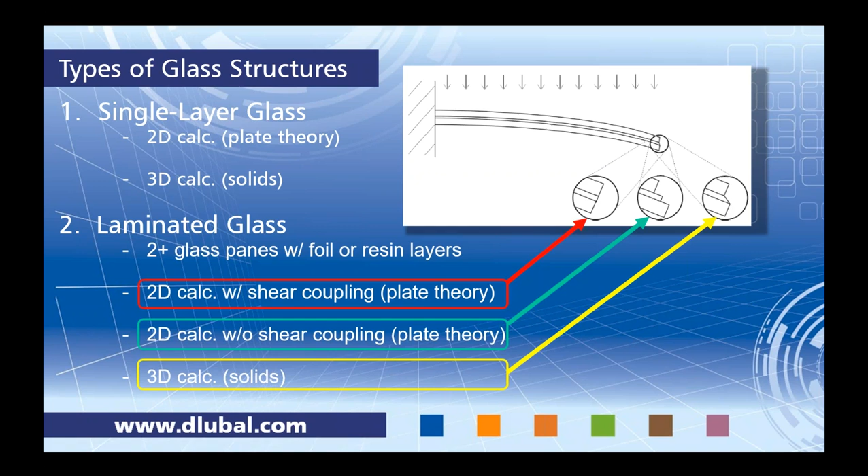Like I said, this is certainly the most accurate option. A downside to this, though, is that your solve time will be longer than typical plate theory.

This will always use large deformation analysis. With the other two glass types, we can do a linear analysis or a large deformation. Typically with plate theory, you're running a linear analysis, but for insulated glass, we actually only give you the option for 3D calculation with solid elements. That's because when you throw in this gas layer, there's really no other way to get the accurate behavior of the shear coupling between the glass layers with anything other than solids, meaning that plate theory with 2D elements is not applicable for insulated glass.

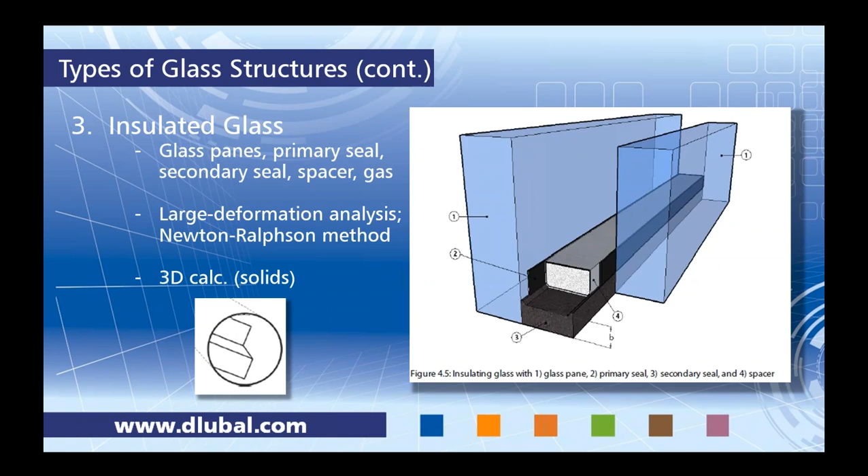So the first being a local calculation. That is where an individual glass surface is analyzed in RF glass. Despite having any supports or boundary members drawn in Rfem, we have to redefine those supports and boundary members in RF glass. With the local calculation, we can either do a 2D or 3D plate theory or solid analysis. And with insulated glass, this always falls under the local calculation because, like I said, we can only do a 3D analysis type with insulated glass.

Now, the other option is a global analysis where the entire model in Rfem is considered. So therefore, things like supports and boundary members that were originally modeled in Rfem will be taken into RF glass. The caveat with this is that we can only do 2D plate theory for this type of analysis.

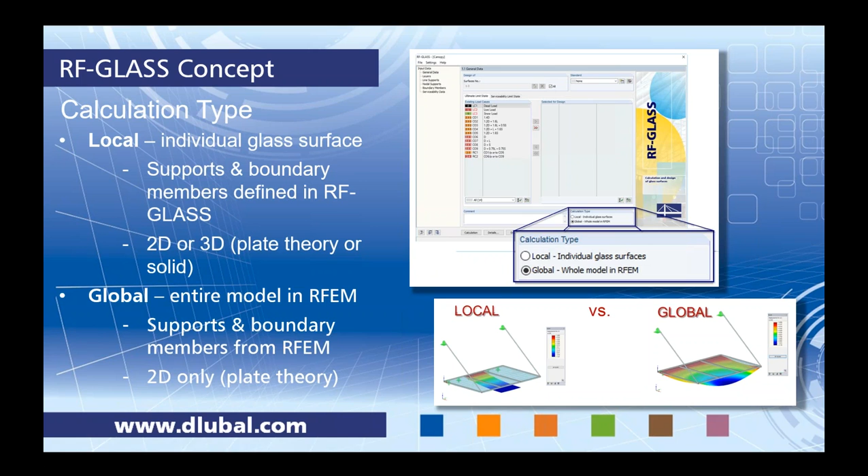So you're probably wondering, well, why would I ever want to do a local calculation if I have to redefine supports and boundary members? Two reasons for that. One, we cannot do a 3D solid analysis with a global calculation. So basically, if you have insulated glass or maybe very thick glass layers that a plate theory won't give you accurate results, the only option is to run a local calculation. The other reason being that the support types as well as the boundary members can be identified in RF glass in much more detail than what you could ever do in Rfem. That's kind of the advantage. Again, we'll see that when we go through some examples today of local versus global.

So with that, we can jump into Rfem. When you begin a new model, you will see this general data box pop up. We just need to first give it a model name, so I gave it some arbitrary name. I have the load combination set to ASCE 7. You can see here that we have the Canadian load combinations as well as many international codes. And then I have the checkbox to create those combinations automatically.

I also always open up my template model. Any model can be saved as a template model, meaning that maybe you have your grid settings the way you'd like, your printout report, your unit set exactly how you want. So then every time you open this template model, everything is ready to go and you don't need to adjust anything next time. So if I click OK, this will go ahead and open up a new model for us. I'm not going to spend too much time today on modeling techniques. We're really just focusing on glass analysis today, but if you are interested more in general modeling in Rfem, we certainly have plenty more webinars such as this recorded on our YouTube channel.

So how I'm going to begin now is I'm going to draw a line element. You can see here that we have a single line element, but we have many more options such as polylines, ellipses, arcs. So basically any CAD-like feature, you're going to find a lot of those in the program itself.

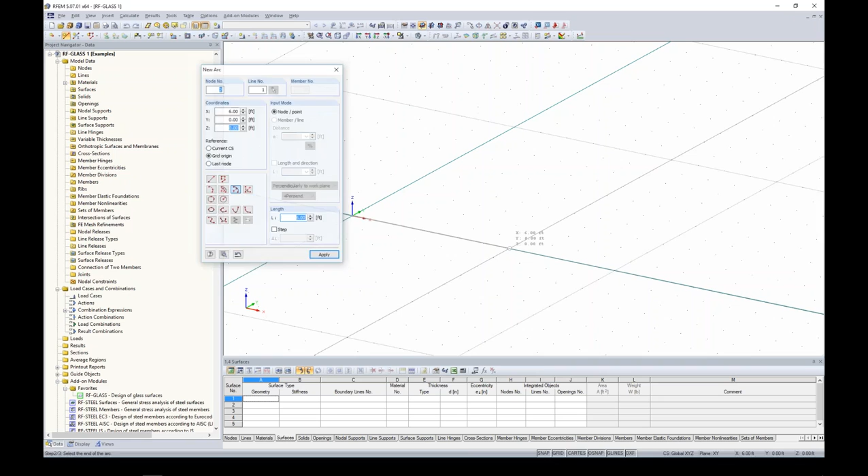For this option, I'm going to choose an arc by defining first my points at 0 and 0, and then I'm going to use my snap point to 6 feet. And then you can see now I want to define my radius. I want to actually reverse the orientation and define my radius at 6 feet.

So now I just have a simple line element. This isn't a member, it's just a line. And then I can actually select this line, right-click, and extrude the line into a surface.

Now, if you were present in my last webinar on cross-laminated timber, the glass module somewhat acts the same way. And how I mean that is the program is asking us now, what material do we want to use when extruding this line into a surface? And realistically, this doesn't matter right now for glass.

This concrete is just a placeholder. So it doesn't matter if I choose concrete, steel, or aluminum. It's simply a placeholder.

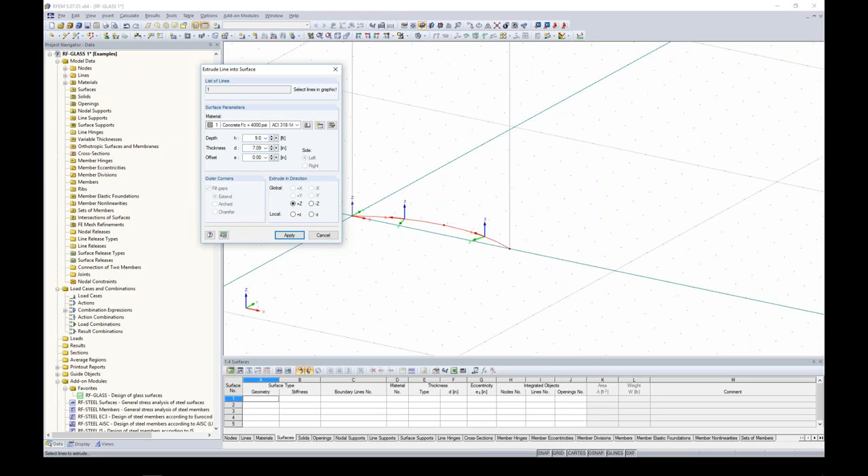The height, though, we do want to specify the correct geometry in the program, with the exception of the thickness. Thickness doesn't matter either because all of our layers and such we will be defining in RF-GLASS.

So if I hit apply, then I can see that I have this surface now created with just a few clicks of a button. The next thing to consider is maybe we have some type of handrail on our glass panel here.

And I don't want to model the handrail itself, but I'd like to create a line so that I can add in a line load to this surface.

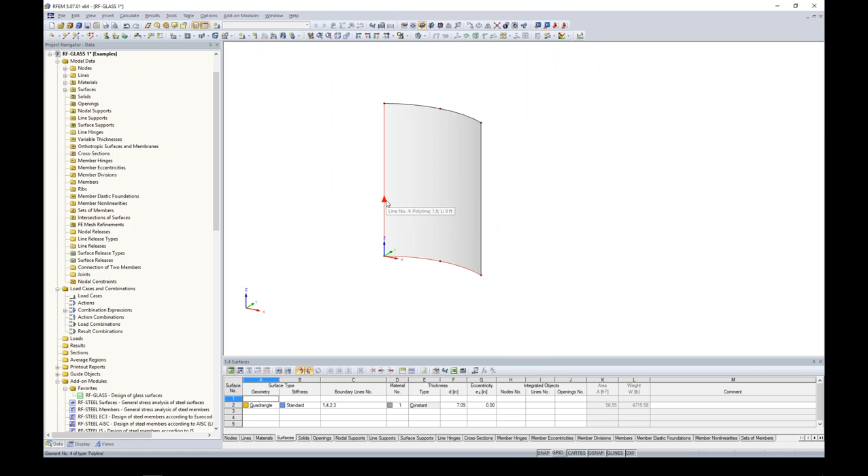So all I'm going to do is select this bottom line here and use my move and copy tool and move it up 3 feet in the positive Z direction. Now you can see that that line is integrated in that surface.

So quickly adding some load cases. Here I will go ahead and add my first load case, dead load, and you can see that the self weight is automatically checked on for self weight.

I'm going to create a new load case called wind load pressure. And you always want to define the correct action category, and the reason why is the program automatically created all of these ASCE load combinations. If you don't apply the correct action category, then you're going to get the wrong load factors.

So I'm going to make a quick copy of wind load pressure, but call this one suction, and then make one more load case of live load and give it the live action category. Okay, so I can click OK here.

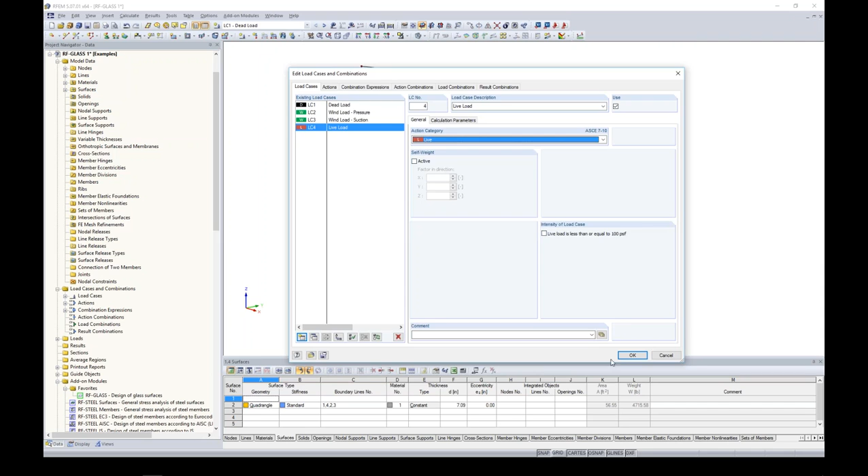Now, if I go to my drop-down box, you'll see that the program automatically created all of those ASCE load combinations. I'm going to skip dead load for now. We'll just consider self-weight, but wind load pressure, we want to add our first surface load on.

If I right-click, I can turn on my local axis system, and I want to add a new surface load. Because we have a curved surface, I want to apply this wind load pressure on my surface in the local Z direction. And you'll notice down here the little picture updates depending on what direction you're applying your load to, which is nice. So in this case, I want the local Z direction.

I want my magnitude to be negative 0.03 KSF. And all I need to do is click on the surface and my area load is applied.

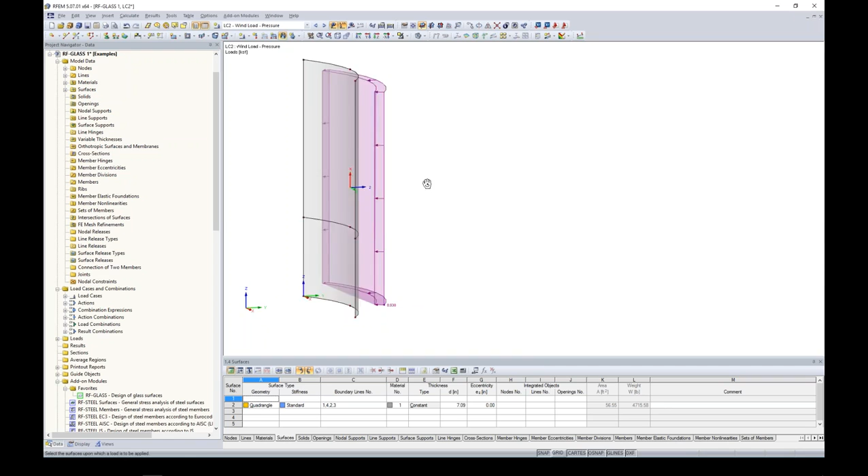I'm going to switch load cases to suction. I'm going to again add a new load in the local Z direction, but this time it will be 0.02 KSF on the other side.

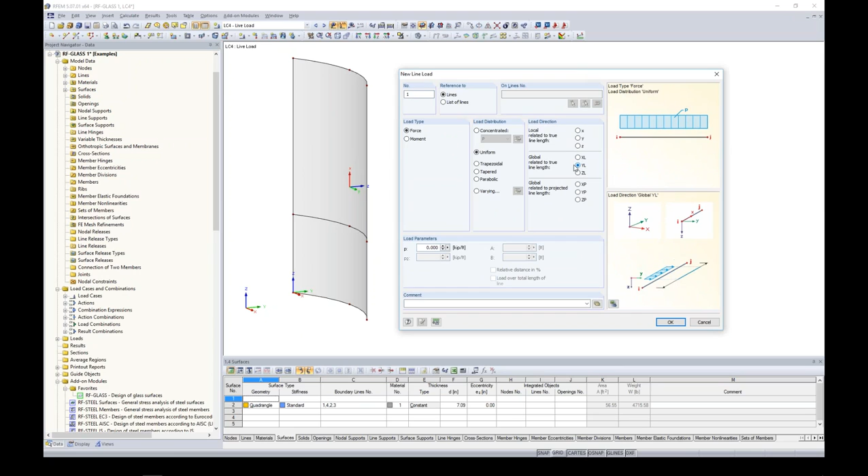And then lastly, we have live load where I will add in a new line load. This I'm going to apply in the global Y direction with a magnitude of 0.07. And then all I need to do is click on that line.

So now we have all of our loads added to this surface. All of our load combinations are done. I want to check my finite element mesh settings. So if I go to calculate and FE mesh settings, the default is set at 1 foot.

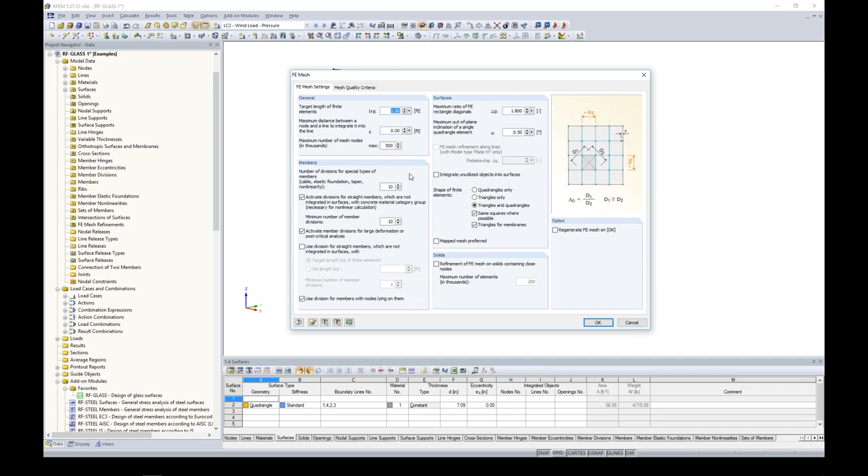The length of 1 foot would probably be okay in this situation since we really don't have much going on in this surface, but it is only 6 by 9 feet. So maybe we want to decrease this to something more like 0.5 feet.

If I go to calculate, generate FE mesh, now we can see the FE mesh is automatically generated. Keep in mind this is different than some of the other programs in that all finite element meshing is done automatically. If I were to move this line up an inch, everything would automatically be readjusted. So you never have to worry about changes happening in your model and the finite element having to readjust that manually.

Everything is done automatically. Now we are ready to jump into our add-on module. So we have this extremely long list of add-on modules, but if I right-click on any of the add-on modules, I can select it as my favorite, which will automatically move it up to the top of the list. So now I can launch RF-GLASS.

Okay, so taking a look at RF-GLASS, as I mentioned, this is the add-on module, nothing more than a dialog box. You can see here that all of our load combinations were brought over from RFEM. The first question it's asking us is what surface do we want to go ahead and design? And you can check the all checkbox since we only have one surface.

Now the other couple things to note here is that we do have the German annex for the standard to go ahead and do glass design. For us, we're going to be doing just an analysis, so we will be choosing no standard. And there's a little bit of a translation issue right now, but don't worry, that will be fixed soon. This is none in German.

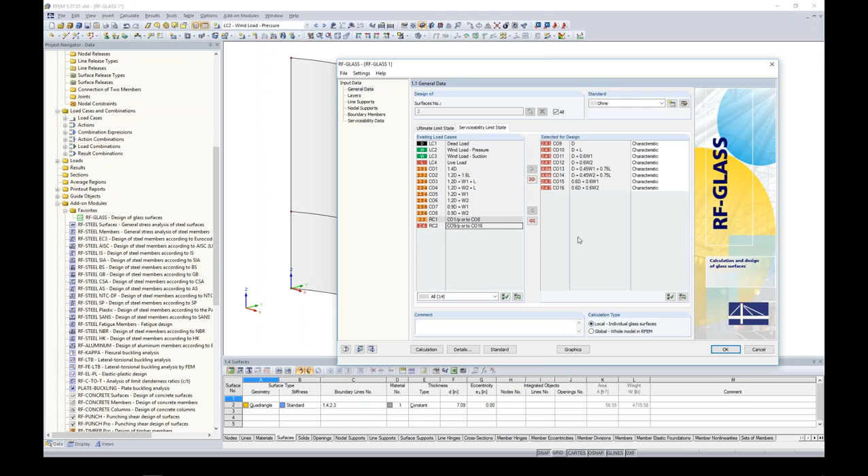And remember back to the PowerPoint, this is what we were discussing on local versus global. My two examples now will be local. So the first one will be local, individual glass surface. We'll focus on that and then we'll get into global a little bit later. And with any add-on module, you just simply work down the list. And extremely intuitive to use. The program kind of sets up your workflow for you.

So we're moving on to layers here. It's asking us, okay, so we can create a new composition. You can rename this. You can create as many compositions as you'd like for different surfaces in your model. For us, we'll obviously only have one composition for our one surface. We need to select which surface this applies to, and we can define our first layer type.

So our first layer type will be glass, and here will be the option to jump into our material libraries database. And typically the standard when you select this will be under the material category glass, and all of these options will be listed. We don't quite yet have the ASTM materials in there, but really that's no problem at all. I added this thermally toughened float glass to my ASTM standard. So anytime that you add in a new material, this will of course be remembered for any future files or models that you were to create with this glass module.

All of our properties are shown in the same dialog box, so everything is okay there. Now my thickness, I want it to be 0.2 inches. Again, all of our material properties are shown to the right here.

Our next layer will be foil. And with this, believe it or not, we actually do have a lot of ASTM foil materials already integrated in the program. For this particular case, I will use 20 degrees Celsius at 1 minute. Again, the foil material properties are shown here. The thickness of 0.01 inches is fine.

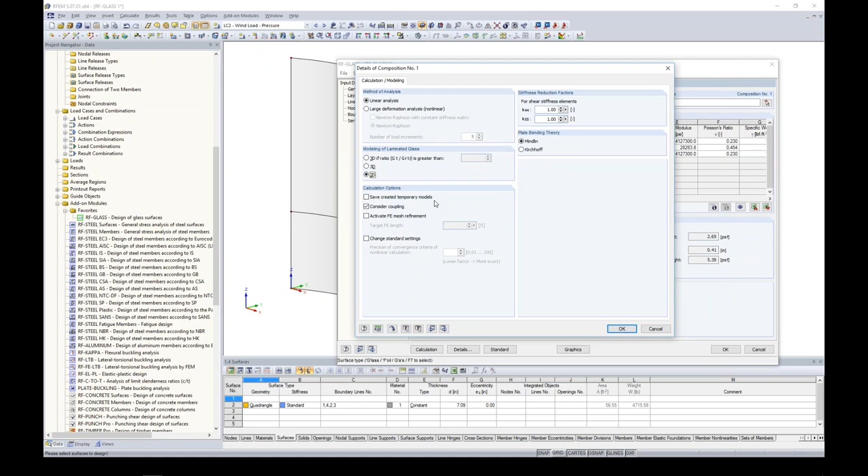Now, calculation options, save created temporary models. What is this? With our RF-GLASS module, which is a little bit different than a lot of our other modules, the program is actually creating a whole other model behind the scenes. By checking this checkbox, we can open up that model just like we would any other RFEM file to view how the program put all these layers together to create our glass surface. In our next example, I'll show you this, so it's nothing to worry about right now.

Consider coupling. Remember, with plate theory, we either have rigid coupling or no coupling at all. If I uncheck coupling, I no longer have the option to turn it to a solid analysis.

Activate FE mesh refinement. This is if you wanted to change your FE mesh of this surface only, or any of the surfaces that you define for this composition. This is nice because I don't have to go back into RFEM and redo my finite element mesh if all I want to change is simply the surface in here. So that's certainly an option as well.

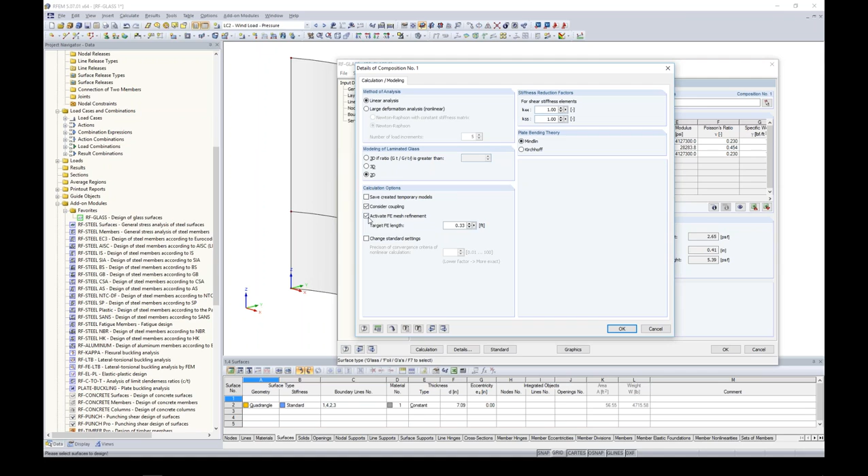Okay, so also notice that we get this nice picture here of the different glass layers. Depending on which line I'm clicking on, this arrow will be synced with whichever layer is shown in this little diagram. Something important to note here: the local axis Z, the positive direction, is facing towards the bottom of the glass. So this is the bottom of the glass, and know that the positive Z axis of our surface is also pointing towards the bottom of the glass.

So for this example, it doesn't really matter because we have symmetry between the top and bottom layers, but our next example will be different than that because we won't have symmetry. So you want to make sure that the local Z-axis and the bottom of your glass are aligned correctly.

All right, moving on down our list, line supports. In RFEM, I didn't define any line support, so if I were to try and run that model right now, I'd obviously get an instability because I have nothing supporting that surface. So this is where, in RF-GLASS, we can go ahead and define these line supports.

The first thing that I need to do, and you'll notice here I have my picture, I can rotate it, I can scroll in, is to choose my first lines. So if I choose them graphically, using my AutoCAD-type features of just dragging a selection box, I chose the left and top lines here.

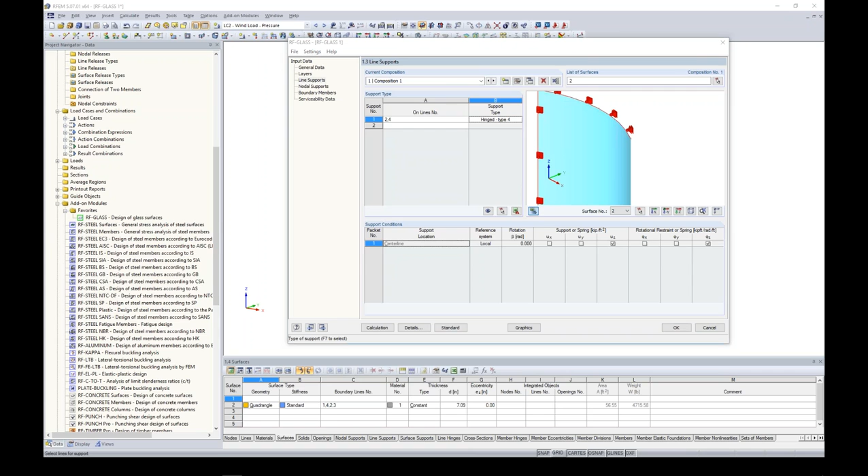And if I click on support type, you will see all of these different hinged options. As I go ahead and scroll through these, you'll notice that the support types are changing down here. If this still doesn't make a whole lot of sense to you, you can always click on this help manual. What this does is bring up our manual for RF-GLASS, and if you scroll down a little bit, here are all these different hinge types.

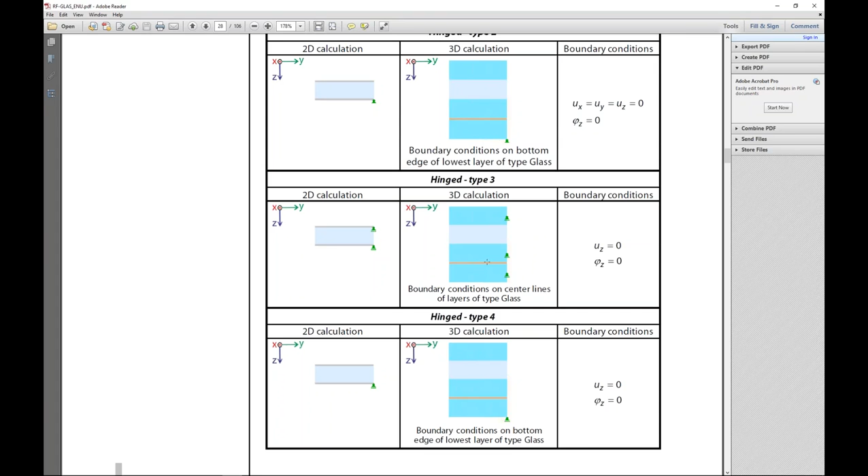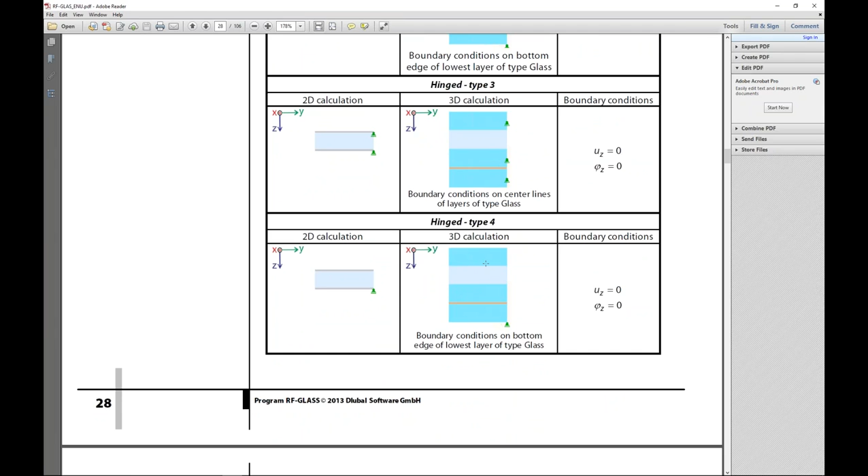It's nice because it's set up in a way that, if you're doing plate theory under the 2D calculation, this is how the hinge type will look. Now, if we're doing a solid model, this is how the hinge type would look for these different options, hinge type 1, hinge type 2. So this is what I was saying, that the benefit of using a local analysis in RF-GLASS is that you can get very detailed in how your glass layers are supported. In RFEM, you don't have these options. You can do it, it's just much more complicated. So in RF-GLASS, it allows you to get a little bit more detailed.

So for us, we will choose hinge type 3. Then I want to choose my other two lines here.

And I can always select a user defined option as well. I don't have to use these already determined hinge types. Maybe I want to unselect translation in the X direction. Keep in mind you can also select springs, so you don't necessarily have to just have a free or fixed situation.

Moving on down the line to nodal supports, exact same concept. Just if you were to have nodal supports instead of line supports, this is where you would go ahead and define it.

Boundary members: it's not uncommon to maybe have something like a channel member up at the top here of our glass surface. I didn't model that in RFEM, and because I'm using the local glass analysis type, I want to define that boundary member here.

So the first thing I need to do is select where I want that member to run. You'll notice that everything is just set to center line because I'm using 2D plate analysis. I don't have any cross sections defined in RFEM.

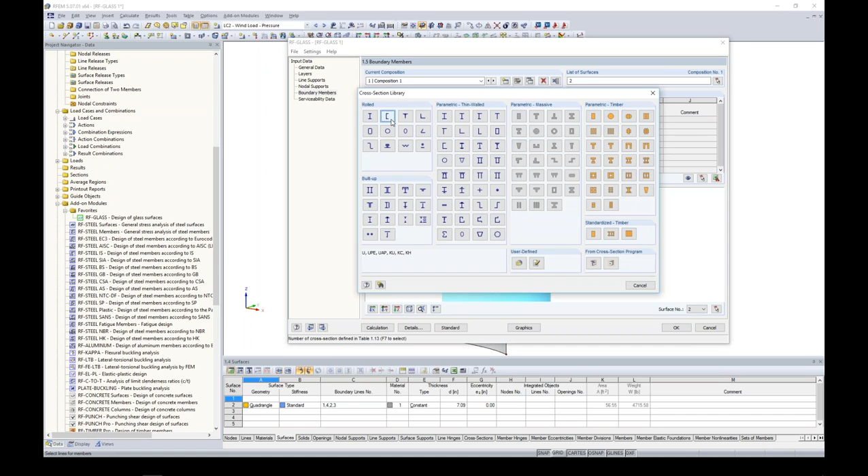Normally you'd think you need to go back into RFEM to create cross sections, but the nice thing is I can do everything from this add-on module. Up pops my cross section library. For this case, maybe I'll choose a type of channel here just for geometry purposes.

Here are all my AISC shapes. Maybe I want a 3x5.

Concrete is obviously not the right material for this, so we can easily edit this as well and jump into our material database. Maybe we want something more like aluminum from the ADM.

Well, I already have aluminum set in one of my favorites group for USA as 6063 T6. Here are all of my properties for that particular material.

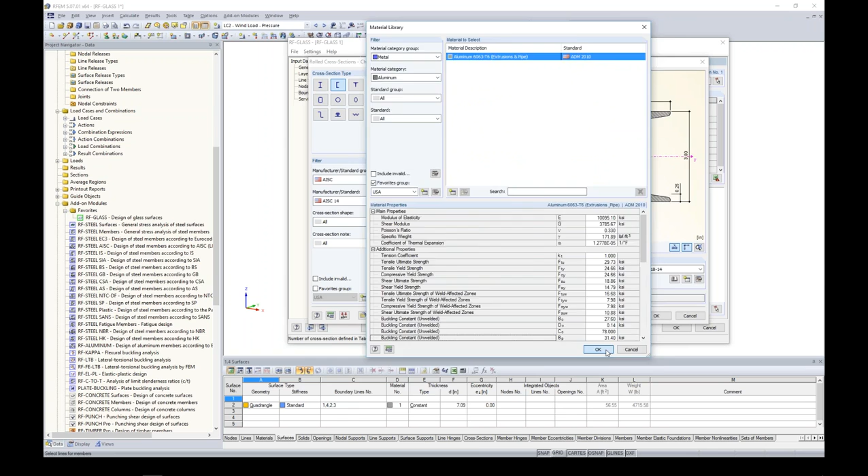I can click OK in all of these, and if I zoom in, I have a nice rendered shape of my channel. You can also rotate it if you need, and the program will automatically update that as well.

So for analysis purposes, we certainly want to take into account the stiffness from this member here. That's the whole purpose of defining boundary members.

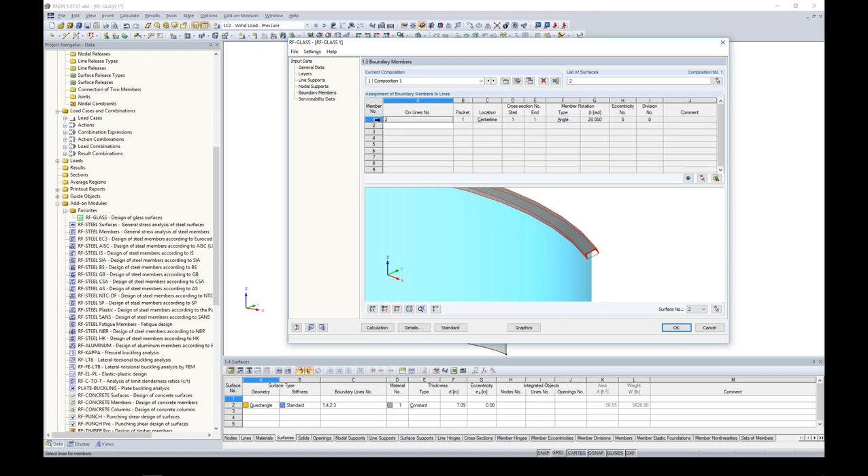Maybe you have a boundary member with nodal supports on either side instead of a line support. That can all be modeled in here as well. This is just for example purposes, so I will delete this for now.

Lastly, we will jump into the serviceability data. This is nice in the sense that if I go to my standard button down here, I have my serviceability limiting deflection ratios, with 3 different types of combinations: characteristic, frequent, and quasi-permanent.

You can see that I can change these ratios for these 3 different combination types to whatever I'd like. Default is L over 100, and for cantilevers it's L over 50.

If I go back to my very first tab under serviceability, here's where those 3 different combination types fall into place. So if you want different limiting deflection ratios for these different serviceability load combinations, it's possible to do it in one analysis without having to rerun several times with different deflection ratios.

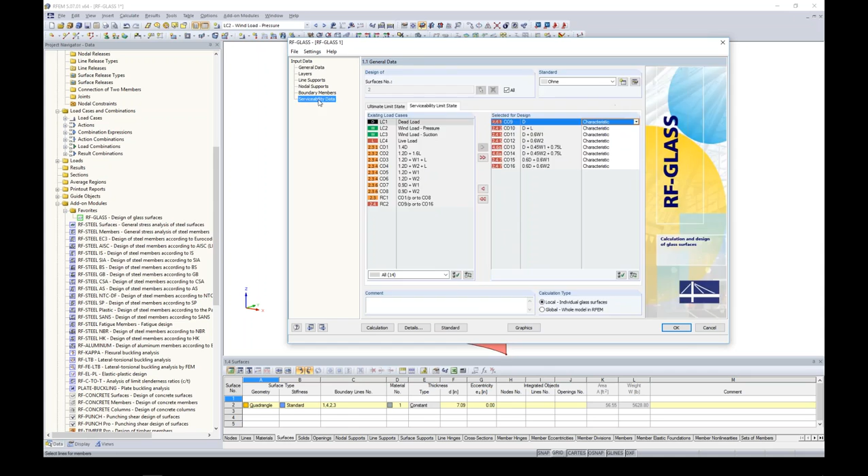The only thing I need to define is my surface. Now the reference length: do I want to use the minimum borderline, the maximum borderline, or define my own? In our case, a conservative option would be the minimum borderline at 6.28 feet, and if it was a cantilever, I could check this option here.

Last thing to check is the details button. You can see that we have all of these options for what stresses we want to show in the final analysis, so I can easily uncheck any of these if I don't want to see them, or check them if I do.

And under the results, there's a few other options for what you want to see in your calculations. For example, maybe we want to see line support reactions. And with that, we are ready to solve.

So what the program's doing now is it's taking each stiffness layer from the glass, creating a more global stiffness, exporting it back into RFEM, rerunning the analysis, and now bringing all of the results back into RF-GLASS. And now we have this results menu available.

Here we can view our max stresses and our ratios by either the loading. We have our different load combinations, load combination number 1, number 2, number 3, and remember this is ultimate limit design. We also have our max stress ratio by the surface. We only have one surface defined, so of course we only have surface number 2 shown here. And then we have our max stress ratio by the composition. We only have one composition defined.

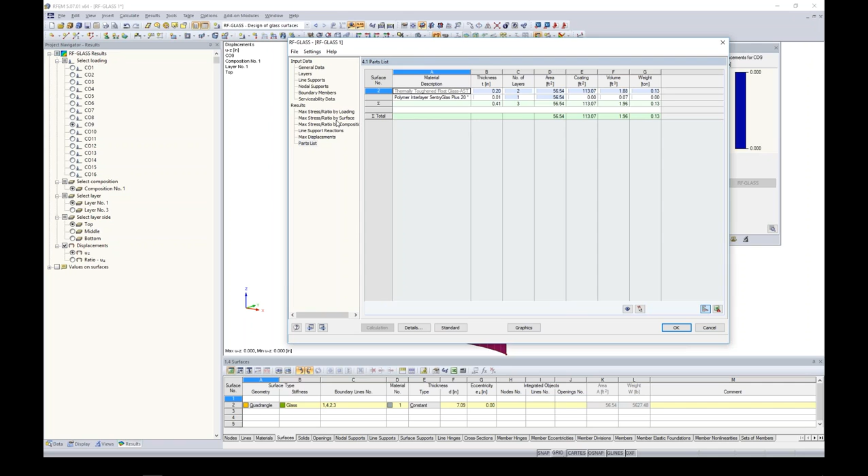Remember, these max displacements are based on the ratio L over 100 that we gave it, and then we get our ratio of our limiting deflection as 0.01, well under 1.0, so we're perfectly fine there. And lastly, we get a parts list or material takeoff for the surfaces that we defined in this add-on module.

Jumping back to the max stress ratios by either loading, surface, composition, there's another option down here called graphics. With graphics, this will immediately bring us back into RFEM, and here we can view the different stresses by contour lines. You'll notice that the results option popped up here in our project navigator. If I look up here, it shows me that I'm still under RF-GLASS. Even my drop down here shows me I'm under the results of RF-GLASS, and here I can easily jump right back into that add-on module. So it's nice if you want to visually see what's going on with these different stresses.

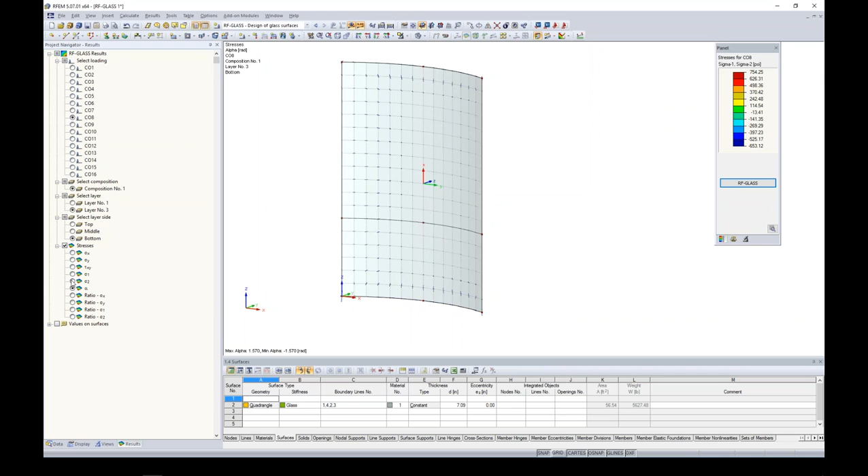Okay, so that concludes the first example. Now, for the second example, I'm going to use this same surface, but I'm going to turn this into an insulated glass example. Time savings—the geometry is already created, the loading's already created, and we're just going to see a lot of the similarities and differences between a 2D plate theory versus an insulated glass solid model.

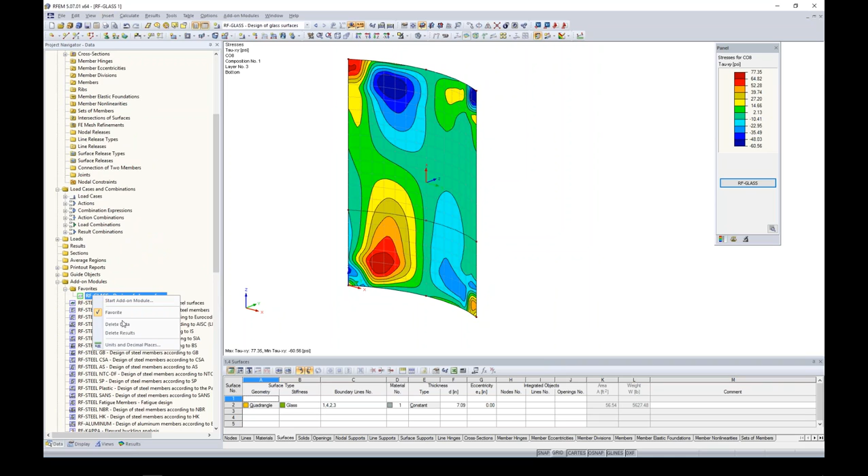I'm back in my data tab under my project navigator, and what I can do is right click here on RF-GLASS and delete all of my data. It's asking me, do I really want to delete this? Yes, I do, and we are back to square one with just a simple glass surface shown now. So here I will launch my RF-GLASS again, and we don't need to spend much time on some of this.

One thing I do want to do real quick that I forgot—let's go back into our load cases, and I want to create one more load case here called Climatic Load. This is for my gas pressures of my insulating glass that I'm about to create. I'm going to create a new load case here called self-straining force. You certainly can put your climatic loads into any one of these load cases that you want, but keep in mind, maybe climatic loads you want a load factor of 1.0. When you put it in with dead load, well, now it has the same load factors as dead load. So most likely you're going to want to keep them separate from these other action categories, which is why I created climatic load. This does have a load factor in our ASCE load combinations of 1.0.

So I can launch RF-GLASS again. Now you can see that my load cases are a little bit longer. I now have this T for temperature included in here as well. So for ultimate limit state design, I'm choosing all of my LRFD equations, and for serviceability, I will choose all of my ASD load combinations.

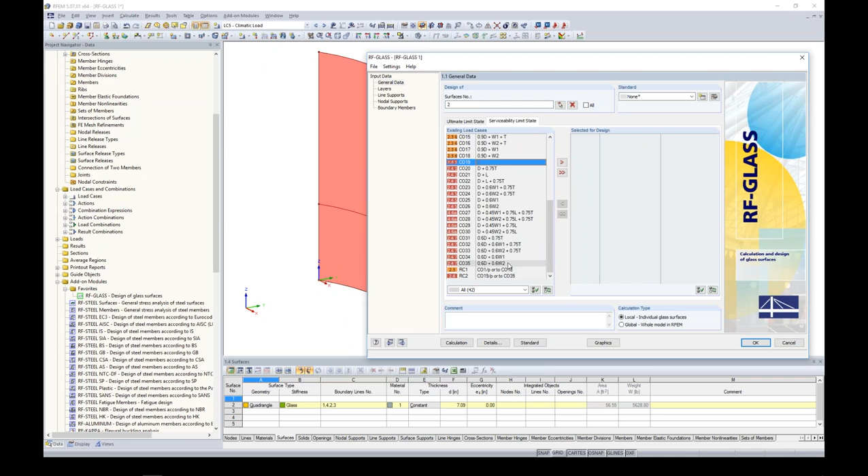Now I want to create my next layer of gas. The minute I put in a gas layer, the add-on module says this has to be a solid analysis. I can no longer do plate theory. That's just a limiting effect. When you choose gas, there's no way to do a plate analysis.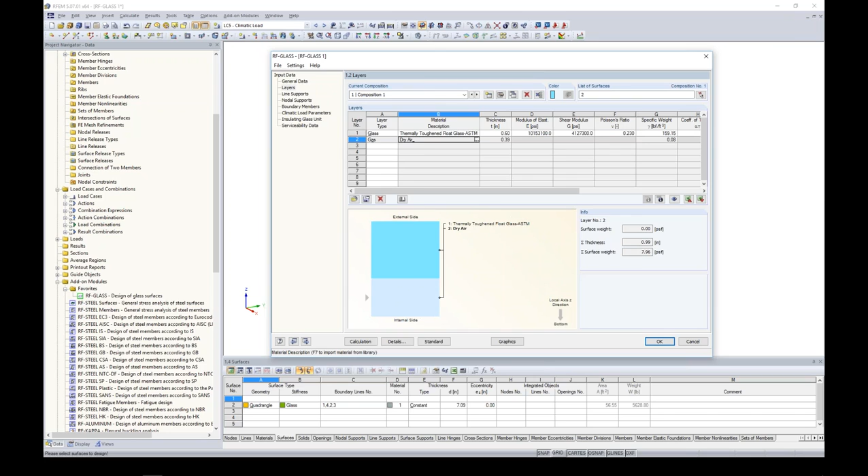For my materials library, for my gases, these are the options that are already default in the program. Argon is a pretty common one for insulating glass. Here are our properties, shown here.

Maybe I want my thickness to be 0.65. I'm going to choose another glass layer of 0.50. And then a foil layer, we'll keep it at 0.01, that's fine. And lastly, one more glass layer at 0.5.

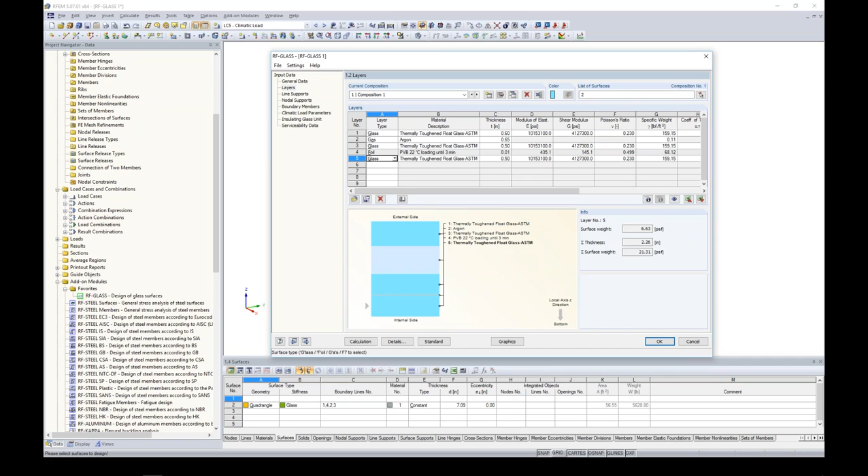Now let's take a look at our details of this composition. You'll notice some changes compared to what we were viewing last time. Linear analysis is no longer an option. We only can do large deformation analysis. As I mentioned, Newton-Raphson is the type of large deformation analysis we will do.

You do have the option here to choose a constant stiffness matrix. This will obviously speed up your calculation time a little bit, but maybe not as accurate of results, because you're not getting that nonlinear behavior with the different stiffness matrix for each iteration. It's up to you though on which option you'd like to choose.

Number of load increments runs parallel with our finite element mesh. Anybody who's done finite element modeling knows that if you have an extremely large mesh, you can get very inaccurate results. However, if you continue to submesh your elements to something very small, your solve time also increases, and at some point your results aren't going to change very much.

It's the exact same thing with load increments. Maybe one load increment won't give you the correct results, but maybe 10 load increments is too many. It slows down your solve time, and your results aren't any different than what 5 load increments would have been. Default is 5 here, but you can certainly feel free to change this if you'd like.

Modeling of laminated glass, we only have one option because we have insulated glass. And then the calculation options, this is where I want to show you save created temporary models. I think it's a very cool thing that this add-on module does in the background, so we can actually view the glass panel after we're done solving.

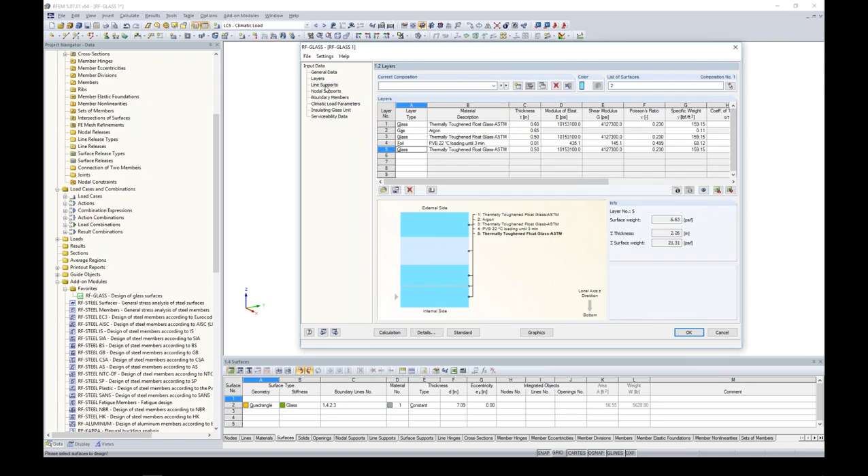Moving on down the line to supports, nothing new here for the most part, so I'll quickly run through this. There is one thing that I do want to show you. If I choose hinge type 3, just like we did last time, you'll notice now that I have 3 different layers, whereas before I only had one option.

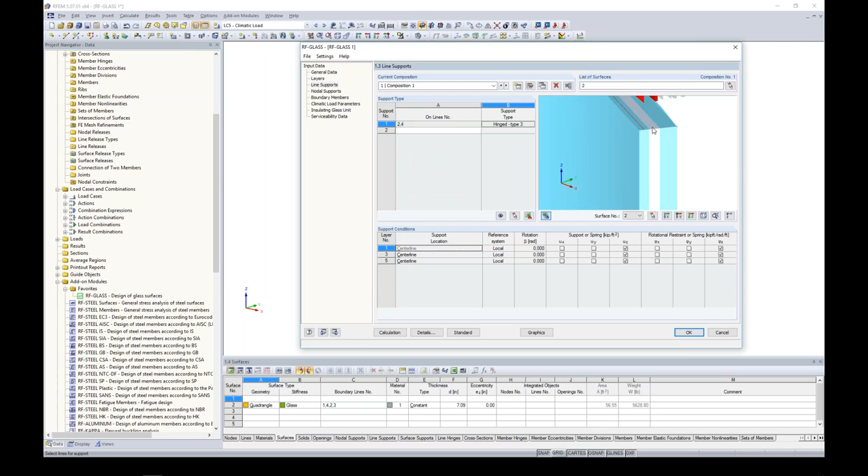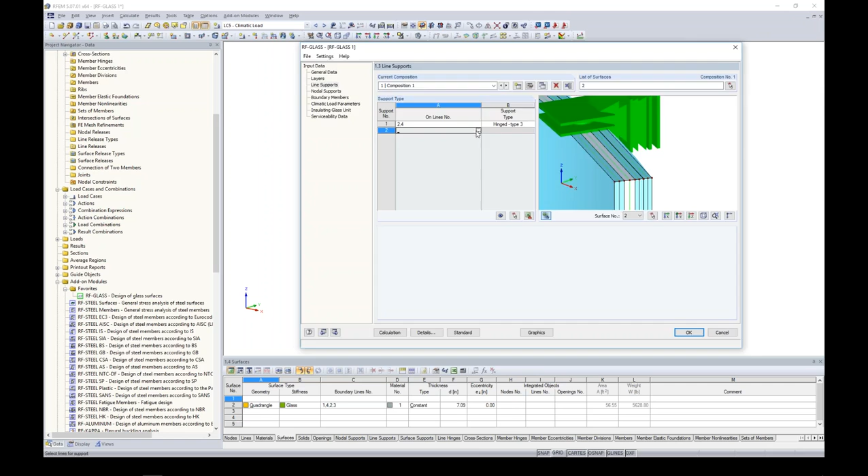With solid elements, if I zoom in here, you can see now that I have these different solid elements where I can apply these line supports at the different layers. As I scroll through here in the table, the little picture updates on which layer I'm at. So that's nice that everything is synced, so I can see exactly how I'm applying these line supports. Same thing with the bottom line and the right line.

Maybe we want to choose user defined here. I'm going to release translation, but now I need to do it for all 3 layers. Nodal supports, same setup - if we were to have nodal supports, we will skip this for now. Boundary members, same concept as well. The one thing I did want to show you, if I choose the top line again for

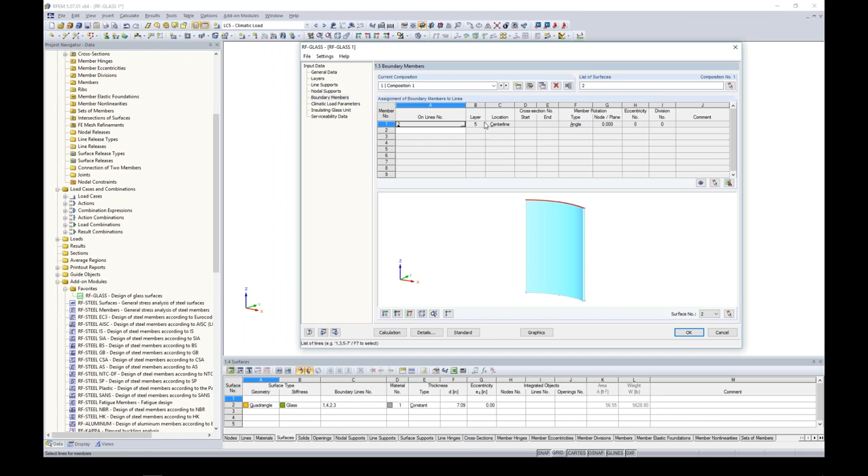let's say that channel, now I get to choose which layer I want to place that channel on. Scrolling down in here, if I choose layer 1, the picture down here will jump to that layer. I can also then choose upper edge, center line, or the lower edge within each layer of where exactly I want to place that boundary member. So this is what I was saying, that RF-GLASS allows you to really get detailed, especially with this solid model, and how exactly these supports as well as boundary members are framing into your glass panel.

Again, RFEM would not allow you to do this very easily. This is just for demonstration purposes, so we will delete this row.

Climatic load parameters. This is something new that popped up when we defined a gas layer. We probably need to take into account some climatic loads. There's a checkbox here, automatic gas temperature calculation. If I check this, you'll see we get some very complex variables. Realistically, unless you're a glass expert and you really know what you're doing, you probably will never have this checked on. It's all kind of behind the scenes, but it does give you control over some of the variables if you want.

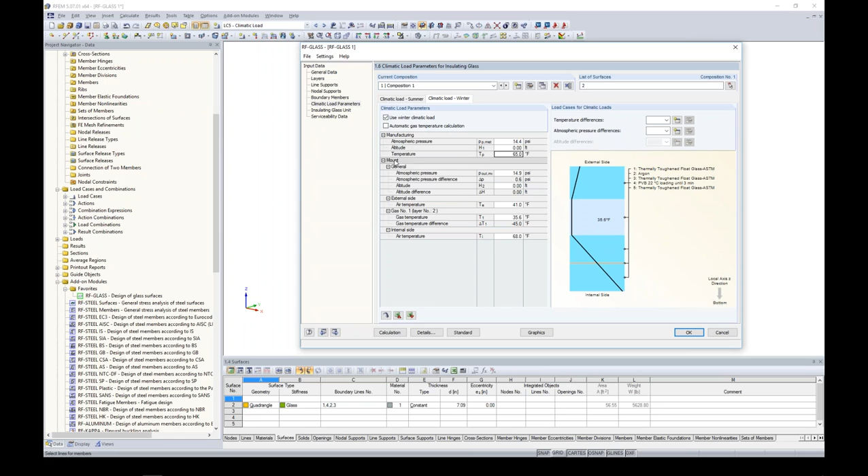Climatic load winter tab up here. Everything's exactly the same. The only thing we need to do now is define our different temperatures for winter. Maybe the temperature in winter at sea level is 65 degrees year-round. Mounting, however, where this will end up, the altitude will be 2,000 feet. The external air temperature can get down to 20 degrees. The gas temperature, 35 degrees is fine. The internal air temperature, let's say, can get down to 62 degrees.

Now again, for winter, we need to go ahead and set our load cases. The program obviously knows that we'll never have summer and winter loads together, so it will actually create separate load combinations for summer versus winter. That's something that you don't have to take into account - the program's smart enough to know that.

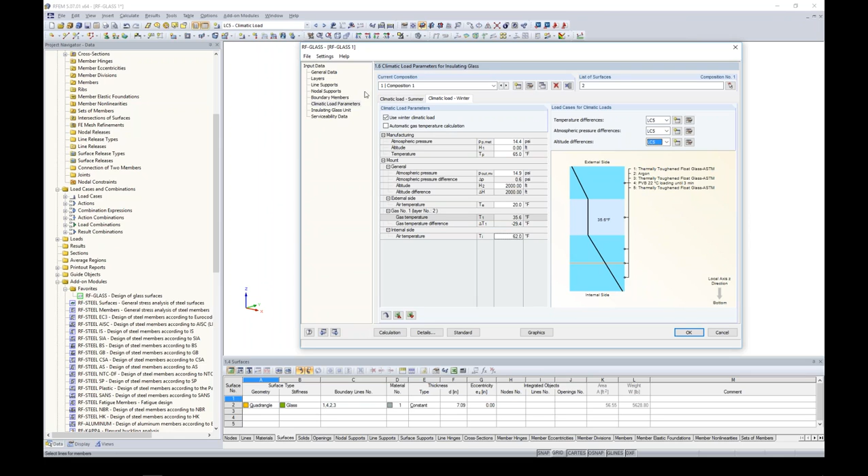Moving on down the list, insulating glass unit. Here is where we can consider our secondary seal options. For this, I want to jump back into the PowerPoint quickly because this is actually a little bit more complicated than what you would initially think. For a secondary seal, there's an option - this is exactly what we were just doing, what you just saw in the RF-GLASS module.

So if I had this option unchecked, there's the use helper supports on gas layers option, which is now grayed out in the program. What exactly are these helper supports, since there's not much information in the add-on module itself? When I have the secondary seal unchecked, meaning there's nothing there, these helper supports will be applied on our glass surface. Taking a look at this picture, glass panels are pretty stiff, maybe around 10,000 KSI. However, RFEM will model a soft material at either end, something closer to 1.5 KSI.

Now, when we don't have these helper supports applied, we get some sort of deflection that maybe looks like this. This is obviously not desired behavior. This is from the gas pressures, and then we're getting our deflection at our sides.

Now, when we add in these helper supports, we add stiffness to the ends here, and we'll get more of a desired deflection with our glass panes. So that is the whole purpose of these helper supports.

For us, we will leave this unchecked for now, so the helper supports will be used in the background. The number of finite element layers in gas layers - our gas layer is only 0.65 inches deep, so 2 layers is probably fine for that. If you had something larger, you can always increase the number of layers. This is something that I think is pretty cool for this add-on module.

Force load distribution. You can see my 5 load cases here, and we give you the option to determine what percentage is applied to the external glass versus the internal glass. So dead load, we only have self-weight - maybe we want to apply 50 and 50 to the external and internal. Wind load pressure, we want 100% on the external side of this glass. Wind load suction, we want 100% on the internal. Live load, it's a handrail, so maybe we want 100% on the internal. Climatic loading, maybe we want 50 and 50. So a little bit more control on where exactly these loads are being applied to your glass surface.

And lastly, we have our serviceability data. Here we can just select the surface, and it's applying it back to those service load combinations and the ratios that we've set here.

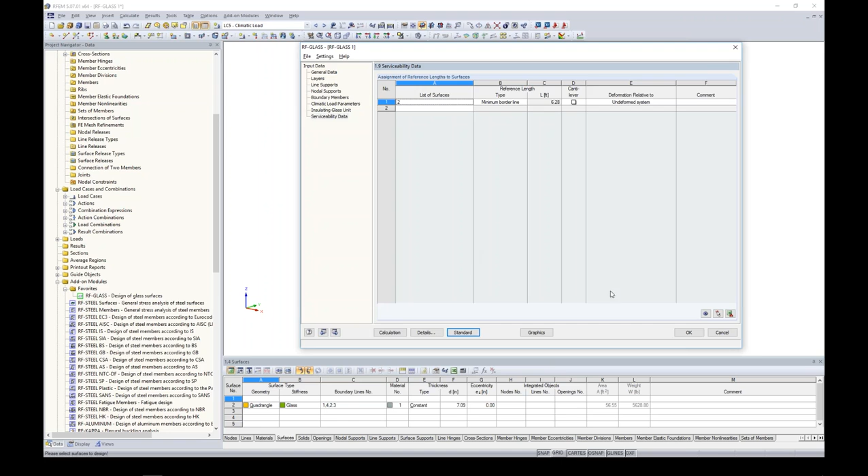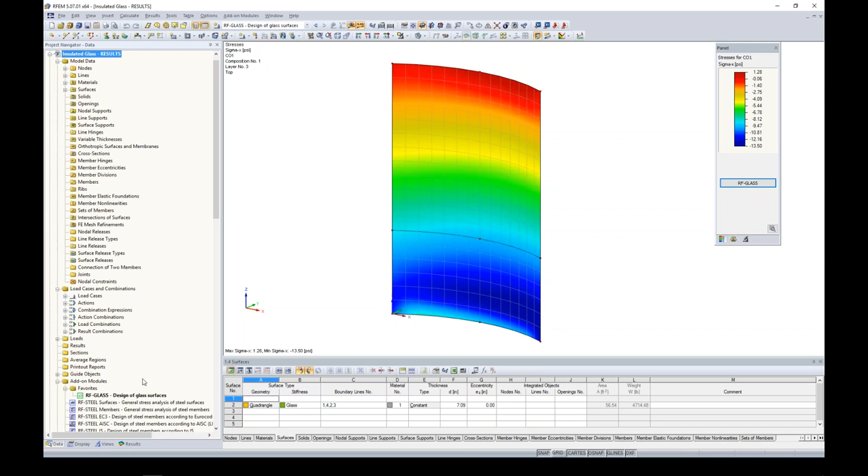And with that said, we are now ready to run an analysis. As I mentioned before, a solid analysis takes much longer than typical plate theory, so I already went ahead and ran this result because we don't want to be sitting around for a few minutes with nothing to talk about. So here are the results for this exact same model that we were running. Let me open back up my RF-GLASS module, and this is what it should look like once we are done with the analysis - nothing really too different from our plate.

Obviously, we're going to have more layers here for our stresses. You can see my max ratio is 0.99 - maybe for design, this is a little bit high, we wanted something more like 0.9. Regardless, we still get our green smiley face because we are under 1.0.

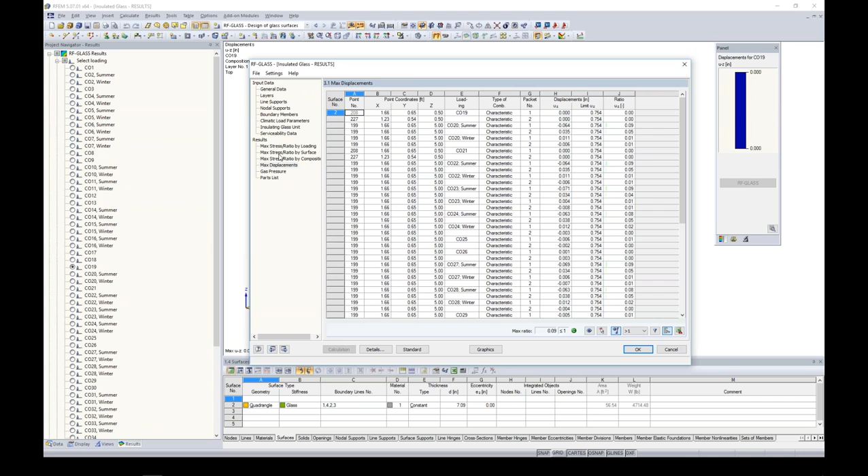Again, feel free to export any of this data into Excel - pretty much the same thing that you would see before. The one thing I did want to show you guys is under, let's go to gas pressure, for example. You can see here the loading CO2 summer, CO2 winter - like I said, the program creates 2 load combinations, one for summer and one for winter. And here you can see all of your different gas pressures.

Jumping back to one of these stresses here, we can see our stress diagram, and now we have our glass layer. Gas, we obviously won't have any stresses, and then we have our other 2 glass layers. So with this, we get the accurate shear coupling behavior based on the stiffnesses of our intermediate layers, which you can see modeled quite nicely with these diagrams for each layer.

Jumping to our graphics, again, we have control over what stresses maybe we want to see graphically based on the contours. So nothing too different, essentially, than what we saw for the results from our plate theory.

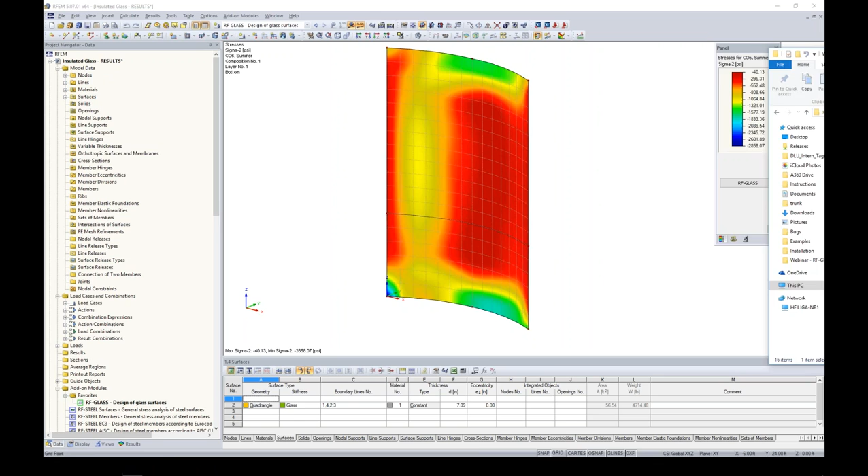Now, remember how I checked that checkbox to save the model being created in the background? If I show you my desktop, here are the model insulated glass results. I just saved it to a folder on my desktop, and automatically the program created these 3 models as well. I had nothing to do with creating these; they were created behind the scenes because I checked that checkbox.

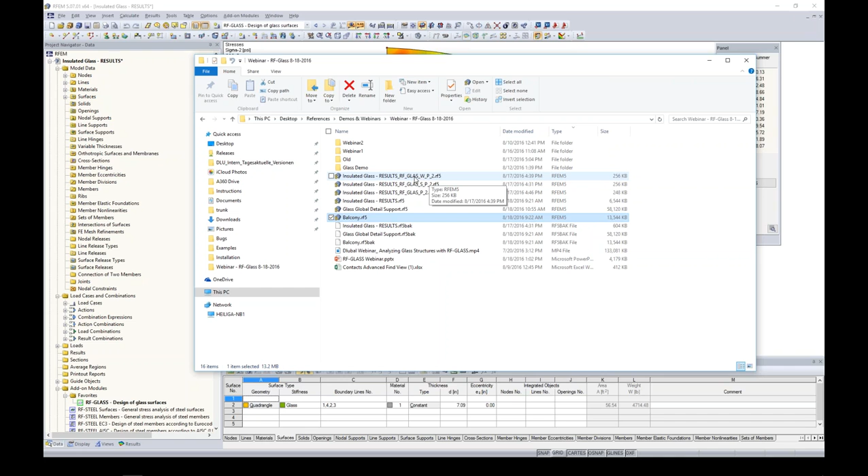You can see here we have W for winter, S for summer, and a third option which doesn't include climatic loading. If I open one of these, let's say the winter one which I already have pulled up, this is what I was talking about when I said it creates this model in the background. I can zoom in here and see my solid elements.

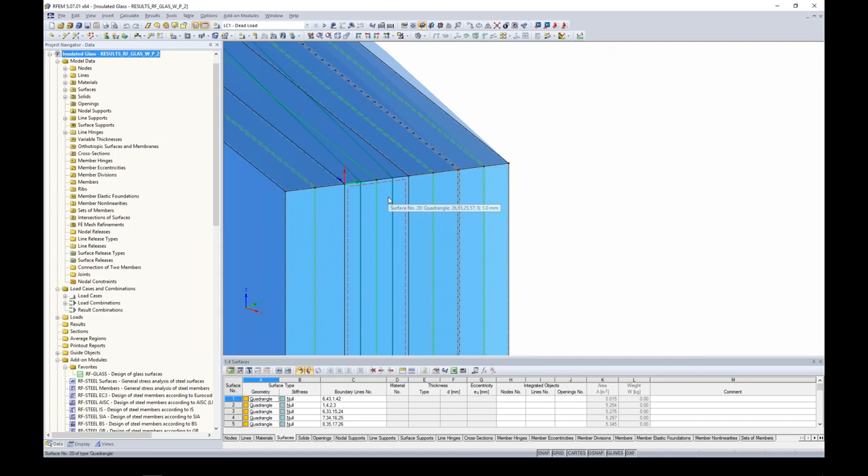I have my first solid for my glass layer. There are 2 layers here. If I zoom in really close, here's my foil layer, here's my other glass layer, here's my bigger gas layer, and then I have my other glass layer. I can turn this into wireframe too to see what's going on.

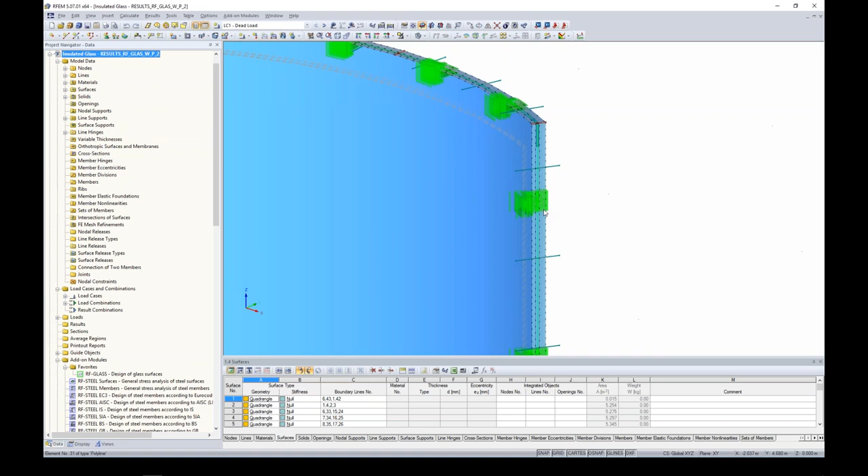The other thing to notice are the supports at all the different layers. This was everything we defined in RF-GLASS. You could sit here and model this in RFEM, but it would take a while, whereas with RF-GLASS you just give it some properties and the program creates everything automatically, including our climatic loading.

If I show you now our new LC5 for climatic loading, we now have these surface pressures on our glass unit. So this is what's going on behind the scenes: the program is automatically creating this solid model for us. I wanted to show you exactly what that checkbox does when we want to save and see these models. Okay, that concludes the local calculation types.

So probably everyone wants to know, well, what about the global? Maybe some people are a little more interested in that. Well, let's take a look at this example here.

This was modeled by one of our glass engineers, and I'm going to quickly turn off the FE mesh and our FE mesh refinements. You'll notice people often ask, well, can you put holes in your glass? Yes, that's no problem at all. You can see here that this is a glass surface, and we modeled a hole in it right here.

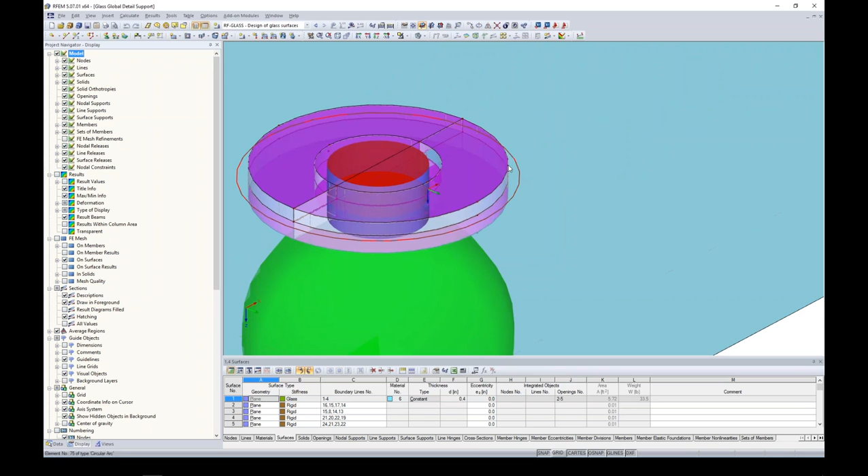Now what we also did was model a contact element, a contact surface. This top one, if we click on it, is a rigid surface. If I click on this middle contact surface here—sorry, let me zoom out. If we go into an elevation view, this is really an exact model of how this support will act with this glass panel.

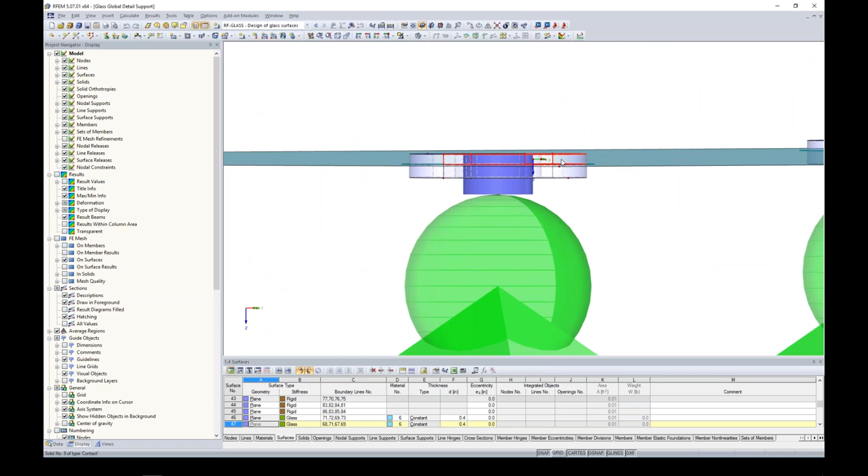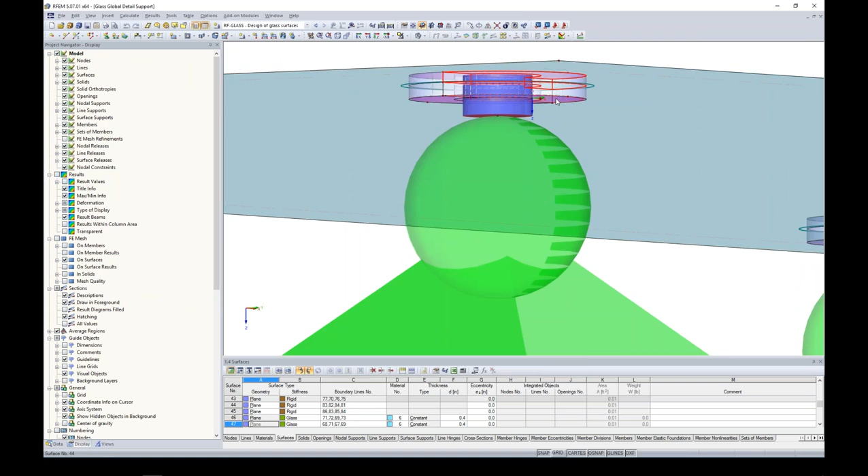If I double click here, I have a contact surface. Looking at my nonlinear settings, I have failure under tension, so basically this contact support will fail if any tension is experienced. And again, on the bottom we have another rigid surface. So this is just a more detailed modeling of the glass and its supports.

This is something you obviously can't define in RF-GLASS. This was modeled in RFEM, our main program. Let me show you the finite element mesh too—let me turn that back on. This is pretty powerful as well.

The finite element mesh you can see here is set at some arbitrary number. But the other thing we did is add some finite element mesh refinements here, and that's what these circles are about. If I double click on one to take a look, we made a finite element mesh around a node.

We set the inner length to something very small. Full precision shows it's at 0.0003, and the outer is 0.02 feet. So the program will gradually increase so that we have this smaller finite element mesh at the node here, which is kind of required because we're getting some small elements here.

Jumping into our RF-GLASS module, you'll notice under the general data—I already ran the results for this—I now have global selected. If I have global selected, take a look at the input data: I have a lot less options here. I don't have the options for nodal supports, for line supports, for boundary members. I have no climatic loading because I can't analyze any type of insulated glass here.

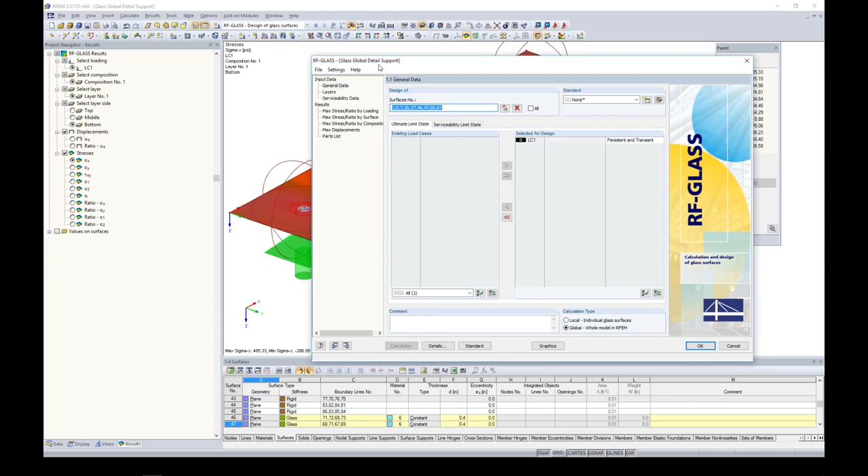With global, remember that we can only do a plate analysis. So basically what the program's doing is taking all of our supports, all of the boundary elements, from RFEM into this.

The only reason now that we're really using RF-GLASS is to get the correct stiffness for our different glass layers. With this case, we only have one glass layer, thermally toughened float glass, so nothing too complicated here.

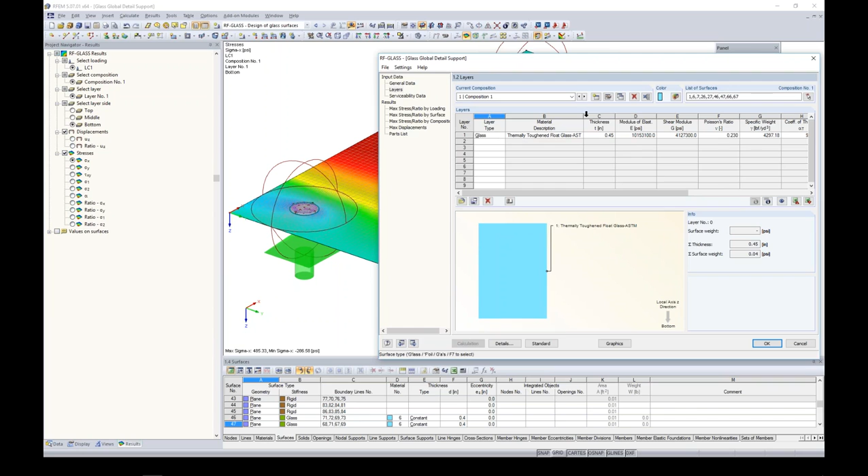We still can set our serviceability data according to those ratios, and then we can run our analysis. We still get our results here for our glass layer. Again, we only have one layer, so that's why our stress diagram looks as such with one layer. Basically, we have the same output type as what we saw before.

But keep in mind that this is a 2D analysis. If I go back to layers, I wanted to quickly show you this. Notice that all of the 2D, 3D, nonlinear analysis options are gone now with global. You no longer have any of those options. This is a 2D analysis, linear analysis.

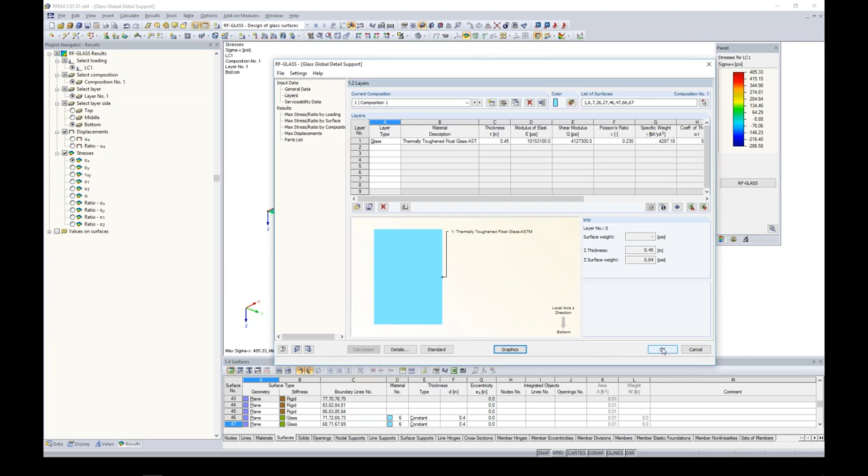I can jump back into my graphics, and we have these nice contours now of our different stresses. Maybe one thing we want to do is make a section cut through one of these. Let me go back to graphics here. So we can create a section cut. I don't know why it's not letting me do that. Oh, probably because I need to go to the results. Sorry about that. Choosing one of these section cuts, maybe I want a little bit more detail through these supports here, because the contours are nice, but we don't really get any numerical results.

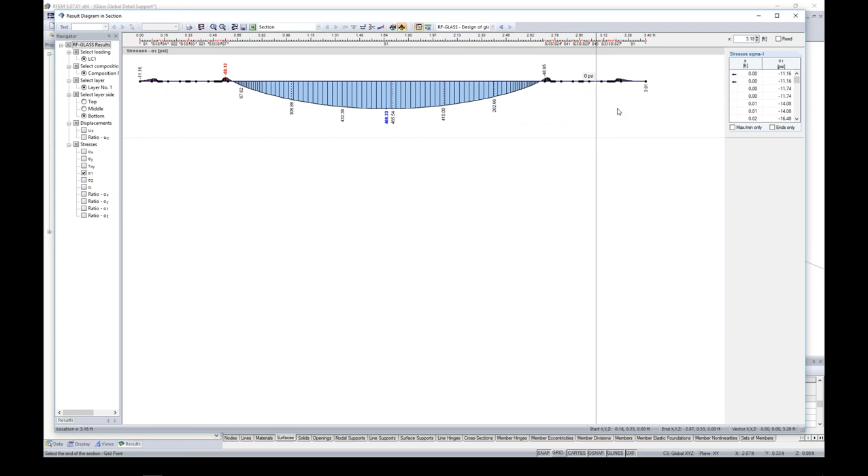Here we can go ahead and turn on, let's say, one of our principal stresses, sigma 1, and then you can turn on any of the stresses that you like. Here you can view it across that surface where we just made our cut for numbers instead of just purely contours.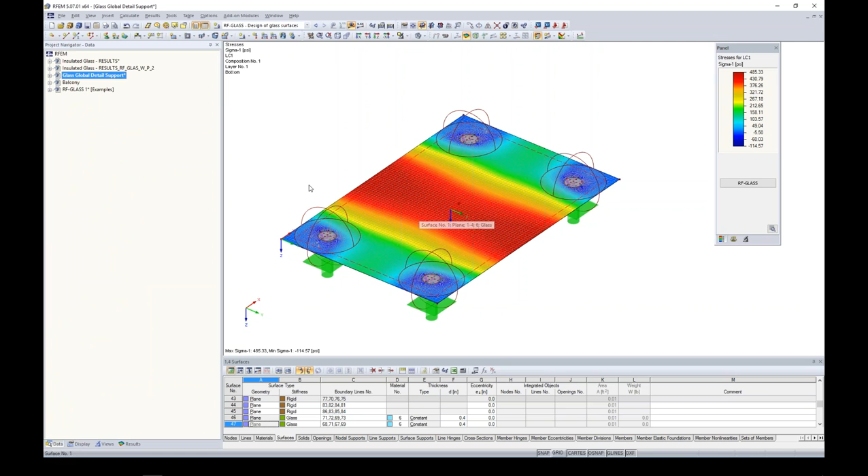The last example I want to show you guys is probably something you have, maybe a full building modeled and you just have a glass balcony or a glass partition that you want to analyze with the rest of the building. So rather than this single glass panel here, maybe you want something more such as this.

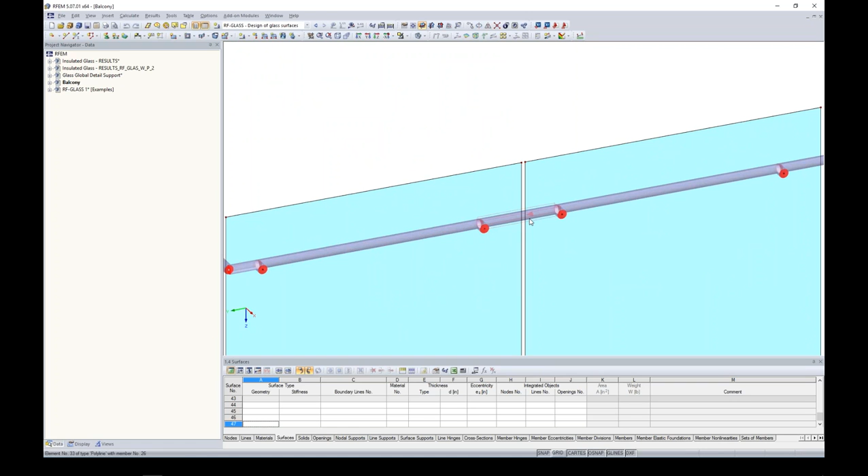This was modeled by one of our other engineers. It's basically a glass type balcony. You can see here if I zoom in, I have my different glass surfaces. There's a little gap modeled between them. We even modeled the handrail attaching to the glass surfaces by a single node. Then we also have these nodal supports at four different points.

I can decrease the size of this so that we can see it a little bit better. I have these nodal supports at four different points along the glass. We modeled in a little member to take into account eccentricity. So this might be something more of an application where you have a bigger structure, and you don't want to sit there and just model one glass element at a time.

Keep in mind, though, you can always do a local calculation within a larger model. That's certainly possible; you don't have to have just a single surface in one RFEM model. So I could do a local calculation on just this single surface here.

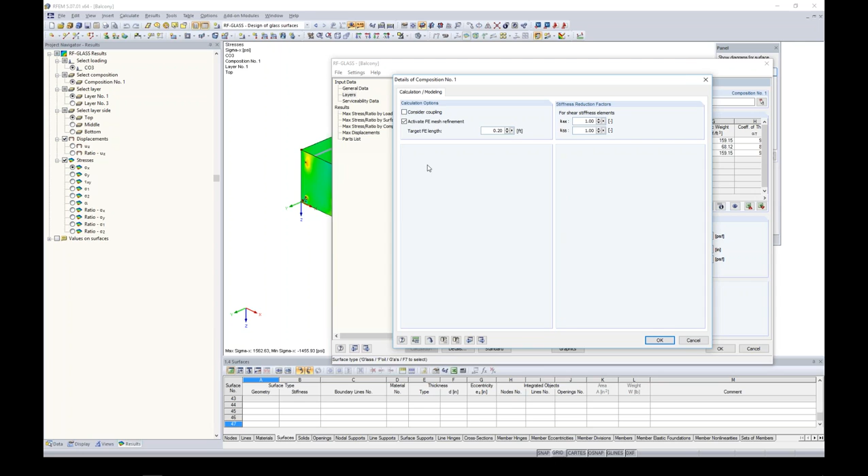So for this case, though, maybe we want to do more of a global analysis. I launched my RF Glass add-on module. You'll notice here I have global selected for the whole model in RFEM. Again, similar to what we saw before, this time I didn't consider coupling, so we'll see how the stress diagram is influenced by that. We have no coupling behavior between the different glass layers. Again, we have no option for 3D solids or nonlinear analysis because we are now in global.

Here, though, are our different glass layers for laminated glass; serviceability data, everything's the same here. Now, taking a look at our results with a max stress ratio by loading, surface, or composition, here's where that no coupling behavior comes into play.

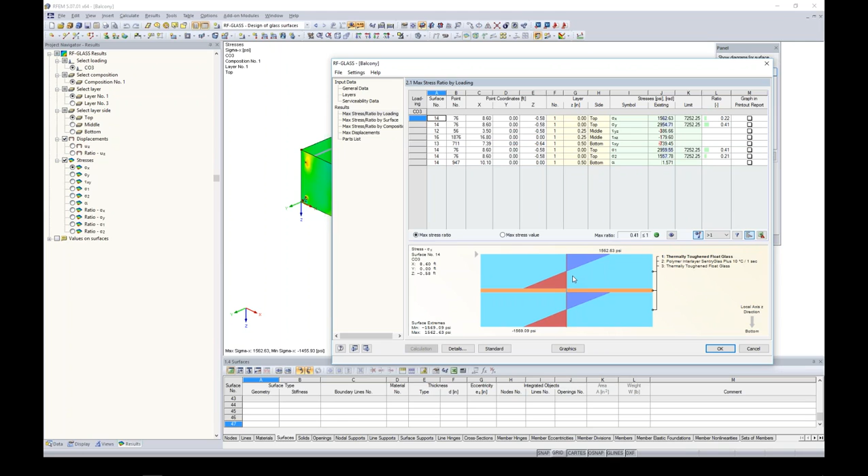Normally, we'd see a stress diagram similar to this top layer throughout the entire depth if we had rigid coupling considered. But we have zero coupling considered, so we have no interaction between the top and bottom layers. That's why our stress diagrams are completely separate here.

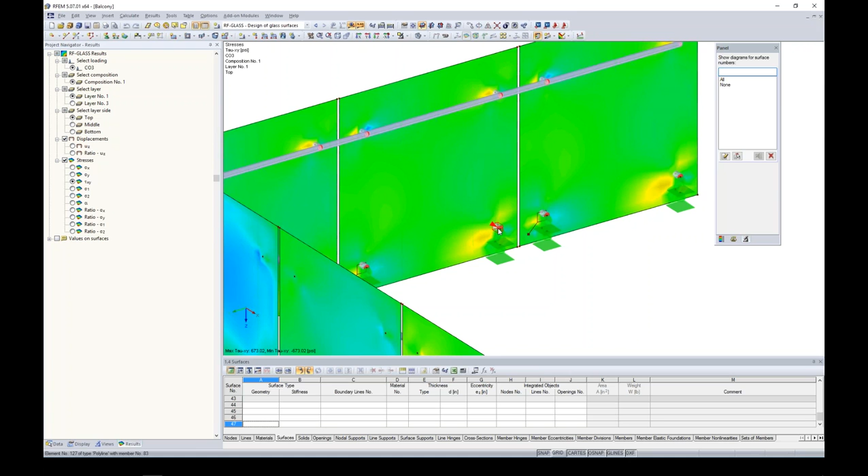Again, I can view everything graphically for my different stresses, which is beneficial. If I were to do a local analysis of one glass surface, I would need to account for the stiffness of this handrail coming in as a nodal support, so it gets a bit more complicated, and I'd need to set these nodal supports with that eccentricity taken into account. So there's certainly some benefit to a global analysis, but if you have very thick layers of glass, a solid element would give you better results, or if you have insulated glass—though in this case you obviously wouldn't have that—just keep in mind that global is not always the best option. But for a situation like this, it's perfectly fine to consider plate theory, and then we get our results for the entire structure.

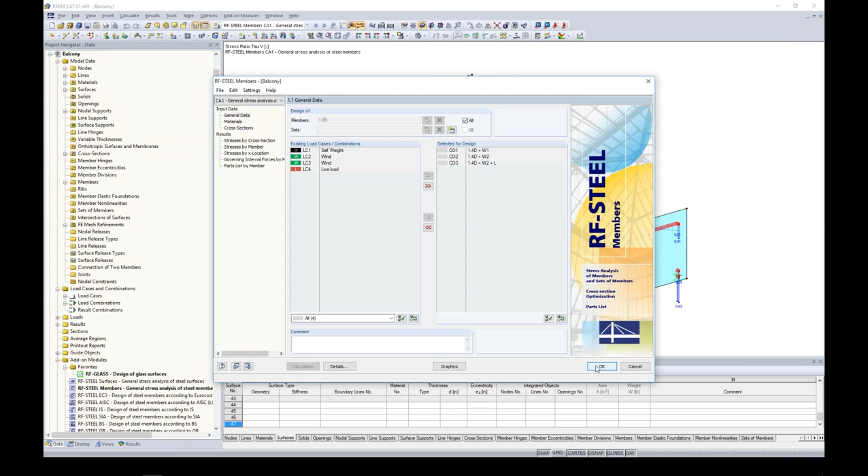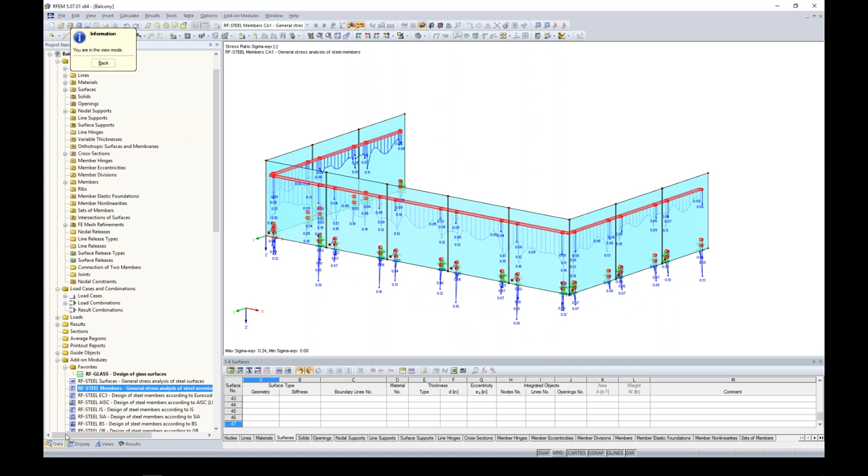The other advantage to this is tying it into other members in the model. For example, let's say we wanted to take a look at the results of our steel handrail. We have another add-on module called RF-Steel that gives you a stress analysis of a steel section, comparing the demand stresses to the limiting stresses. With that, we can view the results graphically of any of the stresses and stress ratios for this handrail. That's what's nice about tying this in to the rest of the model with a global analysis. That sums up the global options here.

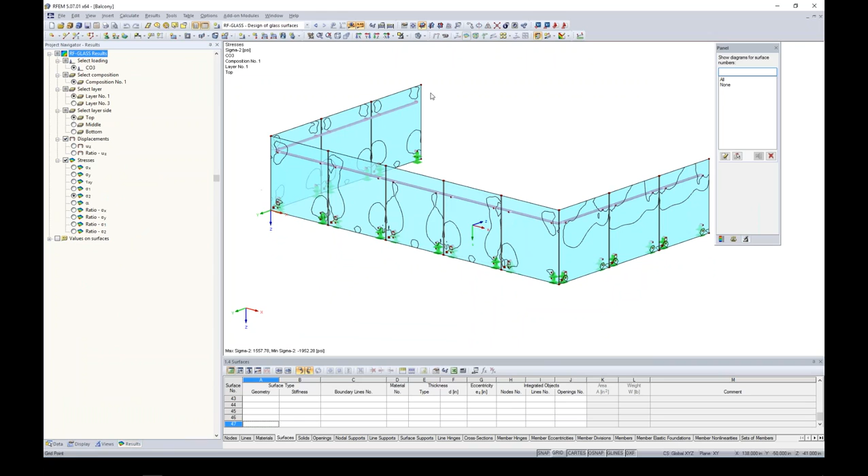One quick thing I wanted to show you guys, which I think is pretty powerful—let's jump back to our results here for our RF-Glass. Let's say we wanted to print off all of these different pictures for our stress contours. Normally in a lot of other programs, you'd need to take a picture, put it in your printout report, come back, change a view, take another picture, put it in the report. For us, we have this option called mass print.

You'll see the option mass print here. If I go into the details under my results, I see all of the results I'm viewing over here, and now I can select all of these stresses, including my ratios. If I click OK, maybe I need to set the size of my picture—I can set it at 50% of the page, that's fine. I click OK.

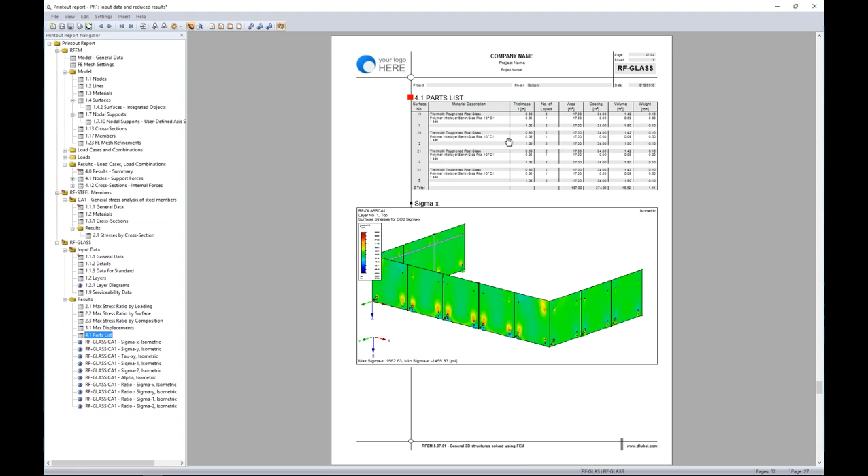The program is automatically creating all of these pictures for us and putting them directly into the printout report. I think our printout report is one of the strongest features, especially compared to a lot of other programs you're used to. It's laid out very nicely, and you can see the pictures were automatically put in based on all of those different stresses. I can jump through them in the table of contents or just view them graphically, and everything was automatically put in there.

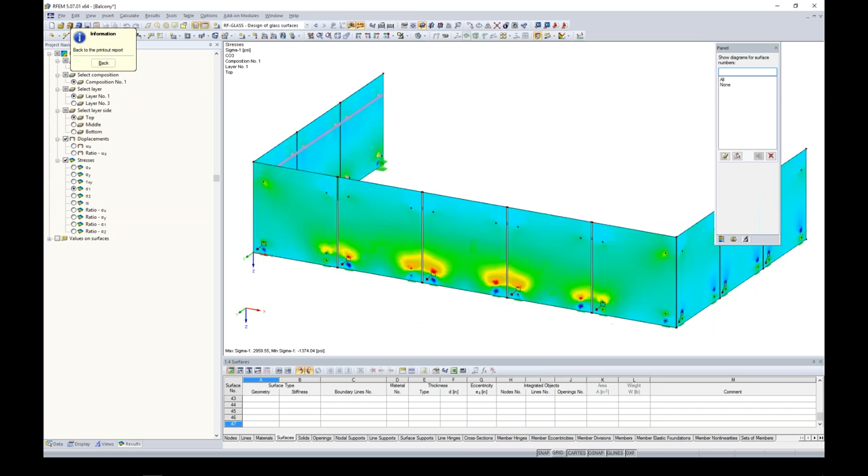Let's say for this one, I don't really like that view. I can click on edit, change the view to maybe a front view here, click back, and the printout report will automatically be updated with that new view, as you can see. The other important thing to note: if anything were to change with your model—a loading change or you rerun an analysis—these pictures all update automatically too. So you don't have to worry about going back and reprinting them if any slight change was made. That's something really nice about our printout report.

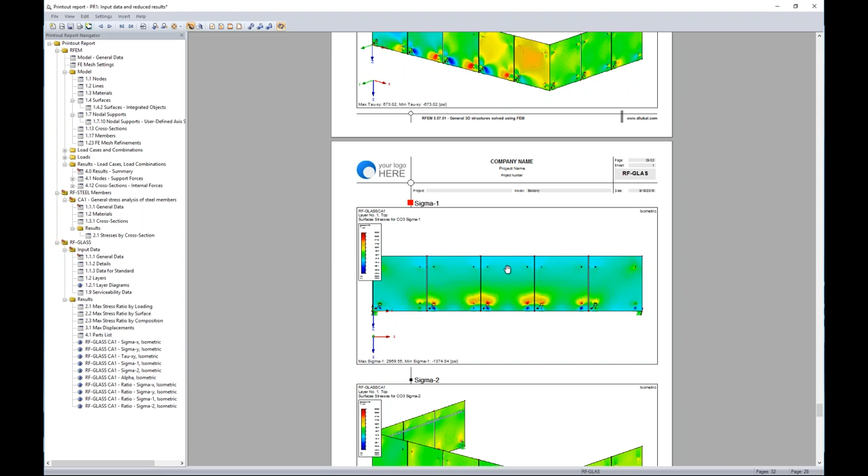Okay, so going back to the PowerPoint, we can sum up today's webinar.